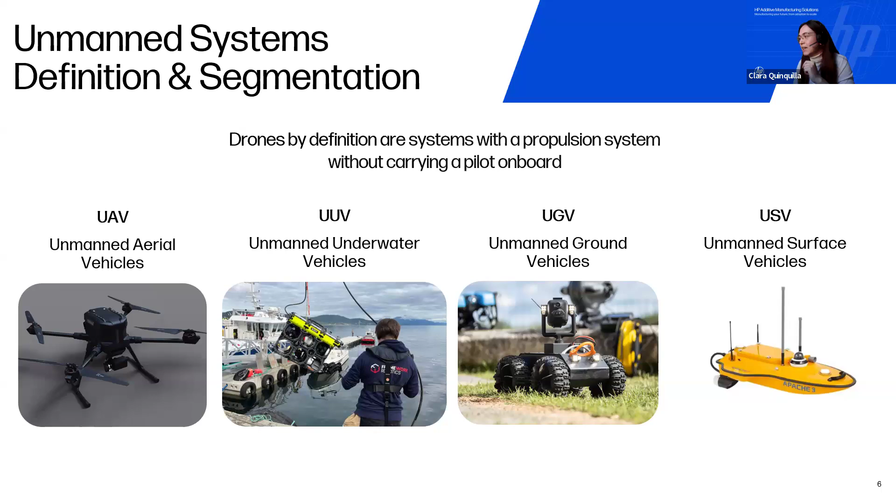You might be thinking that we all know aerial drones, but the reality is that there's a wider variety of drones. Our technology is being adopted in all four subsegments within the drones market, but due to the nature of our guest today, we're going to focus on aerial vehicles. The question we get the most is why our customers are using our technology. What are they printing?

The reality, in just a few words, is that they are using our technology to create highly complex UAV designs to achieve maximum performance. When we talk about performance in the drone space, we are talking about lightweighting parts that need to be aerodynamically optimized. So these parts are not just for rapid prototyping, but due to their isotropic strength, they are used as final parts.

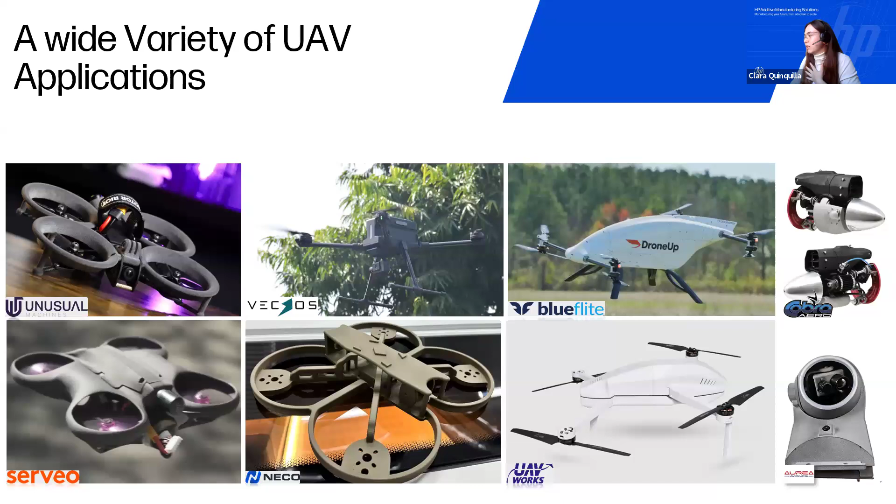Of course, there's the Hunter drone from UAV Works. I'm not going to be talking about this one because we have time later on. But yeah, I believe that this slide is useful for understanding the type of components and the usage that our technology has in this field. So I won't take so much time, but really briefly, the three main pillars of the value proposition that we have in this space. I've been talking about this for a while now.

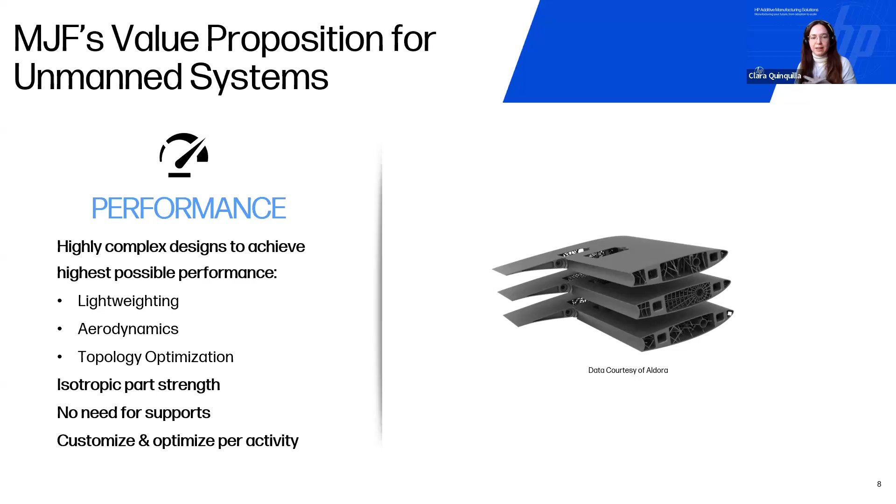The first one, and for me the most important, is performance, because again, here we are talking about components that are just not plug and play, but that need to be super lightweight, optimized in an aerodynamic way. So we are really good at printing parts that are really thin, but are also performing as they need to perform. So for those of you that might not be familiar with our technology, it's a powder bed fusion technology, which means that there's no need for support, which means that any kind of shape can be printed. So this is an example of the infill of a wing using different lattice patterns. Anything is possible with the technology. We just take off the powder inside the parts and we can print whatever shape. So the customization and the possibility to design anything is there.

Then the second one is time to market. We're going to be seeing the story from David, but in this space, it's really important to keep on iterating on the design, optimizing the parts, redesigning the parts. So it is important in this space, the ability to print and produce fast, to test, fail, repeat, and again. And the ability to do such a thing using the same material, but also the same manufacturing method is a positive thing. So this is something that we claim a lot.

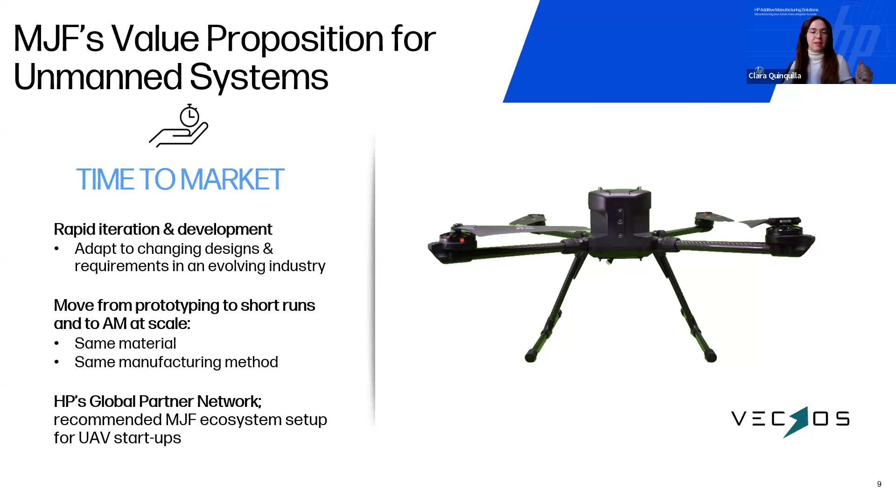And also just mentioning that many of our customers do not have the technology in-house and they don't need to. Just wanted to mention that there's the possibility to print the different parts through parts providers, which is something that I also like to mention, because there are a lot of companies populating this market. They need to grow. I mean, from the very beginning, it's possible that they don't have the need to have the machine in house. That's not a problem in this space.

And finally, the third column is about scalability. At the end, our technology is a technology that was born for scaling applications. So it doesn't matter how much you use the technology, you can take this technology to the limits. And also just wanted to mention as well that the vast majority of the components that our customers are producing fit in our build volume, which is important. But yeah, having said the basics on the technology, let's jump into the work that David has been developing from UAV Works.

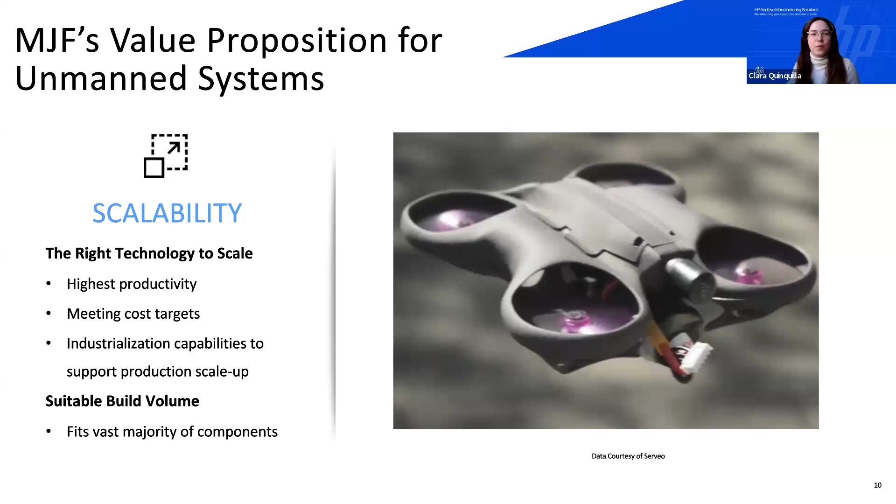So maybe you can let us know a little bit more about who you are, what do you do? Sure. Yeah, as Clara said, I'm technical director of UAV Works. We are a small company that mainly does consultancy in engineering, and we also develop our own drone. So I want to explain to you a little bit the projects we have done in the past and what we are doing right now.

And as you can see here, we have done all kinds of projects. We have done the paperwork to open a new airport, a 25-kilogram drone mimicking the sensors of a satellite, a robot for cleaning windmills, a robot that moves on a cable. It's a cable cam. Someone will know about this kind of robot, and I will show you the electronics box of this drone later, because we did all the boxing with multi-jet fusion.

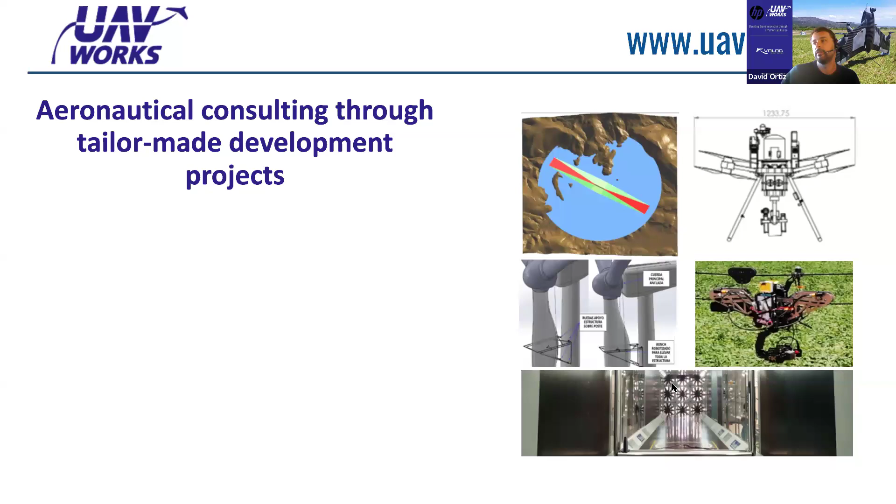And the last robot I wanted to show you is a robot that moves inside a wind tunnel to characterize all the fluid dynamics inside of it. And on the other hand, the things I showed you are the consultancy part, and this is our own designs, intended to be sold as a production product.

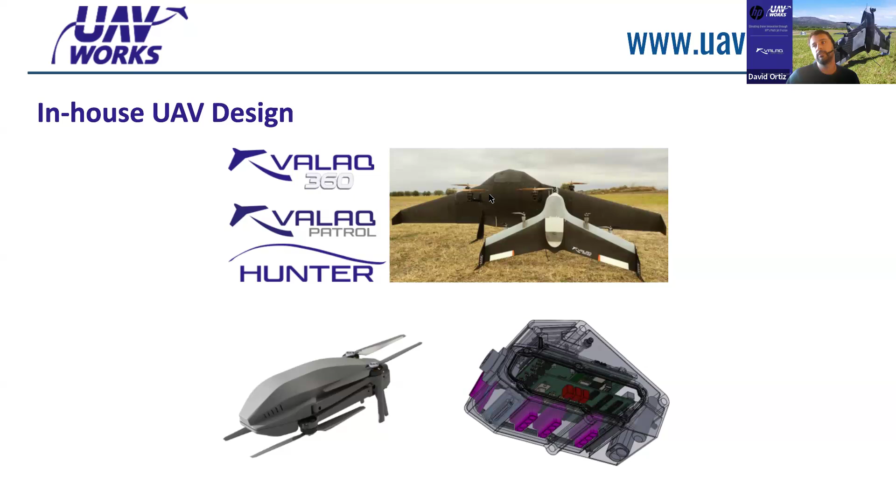Okay, so here we're going to talk about the Valaq 360 and the Valaq Patrol and the Hunter, that is the foldable multi-copter drone, and this is the electronic box of the cable cam. The Valaq Patrol is a surveillance drone that weighs 5 kilograms, and the Valaq 360 is a multi-role drone whose maximum takeoff weight is 25 kilograms.

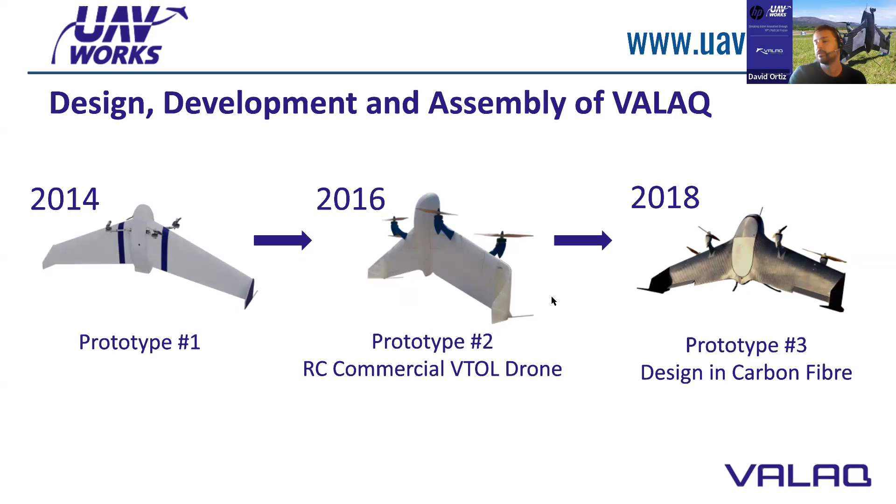In 2018, we switched to carbon fiber because you all know the benefits of carbon fiber, but there were still parts in FDM, but they weren't final parts because, as you already know, for the pylons of the motor mounts, they don't withstand heat very well, and the finish quality is not good. So we finally switched to multi-jet fusion, and as you can see, there are a lot of parts.

And in 2021, we had a final product that to this day is still evolving. We have some changes right now that are not in this picture, and the final product is a drone able to fly at 120 kilometers per hour, 110 minutes flight time, 5G, camera with auto tracking, well, a lot of things. You will see a video later.

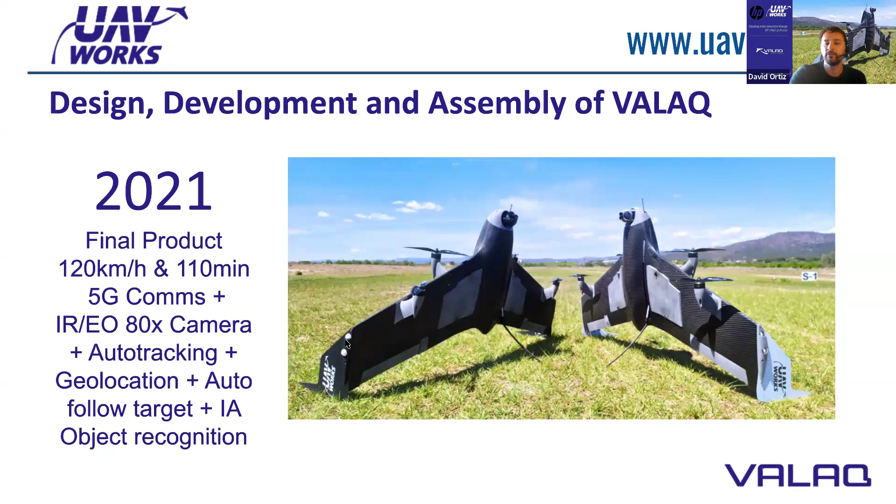Well, we adopted multi-jet fusion because it allowed us to customize every part, being able to modify everything if we need it. At the moment, we are modifying the batteries, so we need to modify this part of the outer shell of the battery. That will be super easy to do. We have no molds to modify, super fast and cheap. And also, by iterating all the designs, we can reduce the weight a lot, as we will see with the motor mount.

Okay, but first, I think I'm going to show you how this product flies and works. You are curious about that? So the flight of the drone is totally automatic. You only have to worry about the camera, and you select take off on the screen of the controller, and the drone will take off and circle around the takeoff point, at the radius you set and the altitude from terrain you select.

And once the drone is in the air, you only have to worry about the camera. So you select, now it is selecting the altitude, and with the second move, you are selecting the radius from the target or the takeoff point.

So you can see we developed a very useful tool for police or whatever authority needs that kind of stuff. Oh, so we ended with the video part, and now we are going to explain some of the parts of the drone.

Okay. This part here is the batteries. And as you can see, there's a battery that fits from the lower part of the wing. And there are 2 built-in screws that turn one turn. And you can fix the battery in the drone and remove it only using these 2 screws.

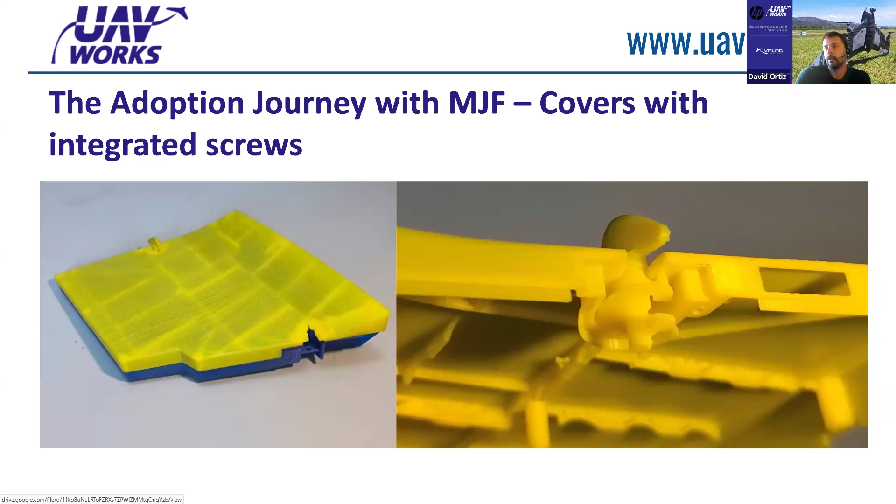At first, the drone was like this. The batteries were like a normal battery. You place it from the center bay of the drone, but you have to remove whatever you have here, and it was super unpractical. So we decided to move to this design. We at first designed all the parts and printed them FDM. The screws were popping mechanisms that you printed in another layer direction, and then pop it out, pop it in. We tried it and it works, and then we switched to the final part in multi-jet fusion.

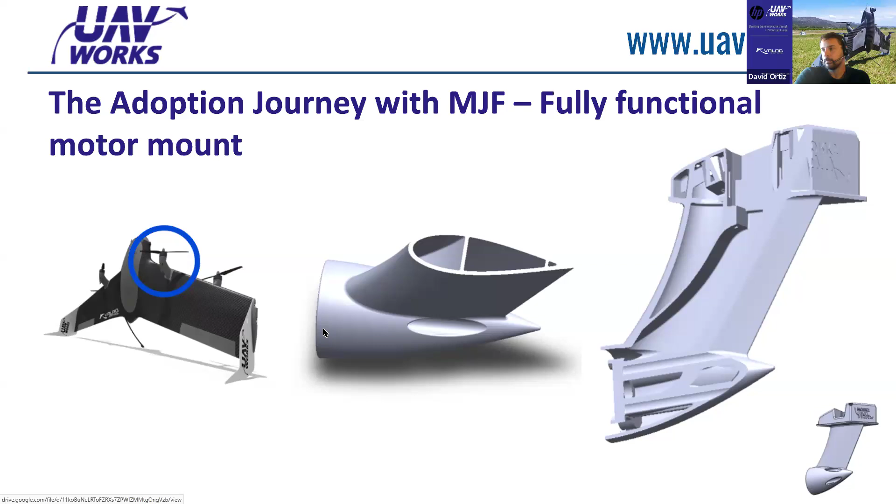And this other part is the motor mount. As you can see, it's a hollow structure able to withstand the temperatures of the motor, with holes in the back to allow the airflow of the motors, and it also has a nut soldered in the plastic, and there's a connector here to connect it to the drone.

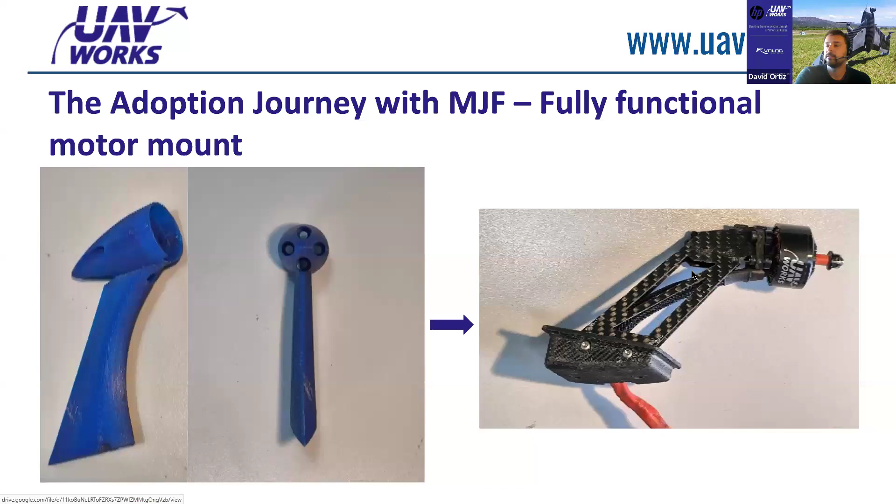And this evolution is more interesting because we did a lot of changes. At first, it was in FDM. We tried it; it worked more or less, but we had reliability issues because if you leave the drone in the sun, or you fly it a long time in hover and it overheats, the plastic will fail. So we switched to CNC machined carbon fiber sheet, and it was working properly, but it was awful in aerodynamics. So we had to put some fairings. So we ended with a super complicated part to build and super heavy.

This is wild, David. I mean, the fact that you can print it in just one component while also optimizing the airflow of the part, this is amazing. This is the right usage of additive in general. I really like this storyline. Yeah, for us it was also amazing. You can imagine needing to assemble all this and print a lot of parts, screws, a lot of things, or it's just one piece. Super easy to build, cheaper, everything lighter.

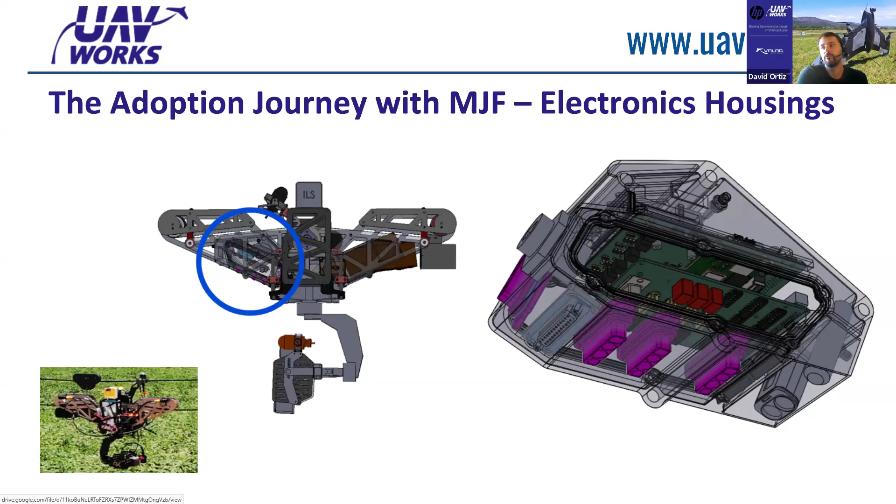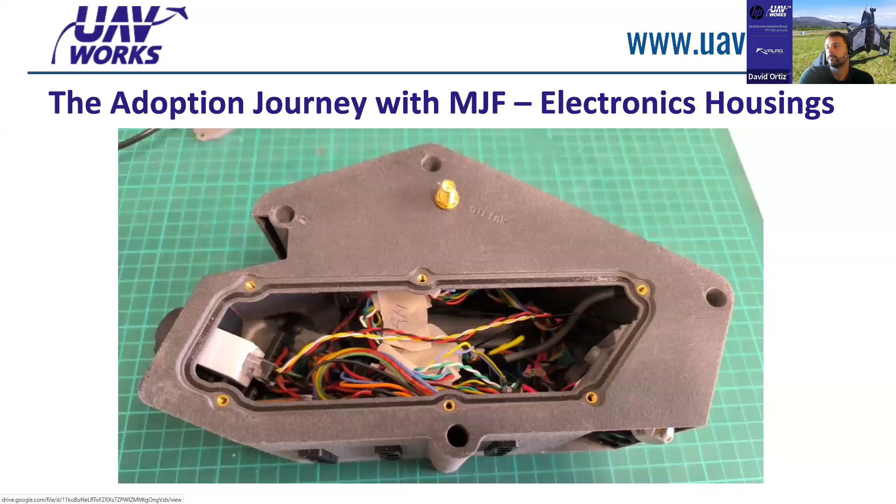A design that is impossible to do if you are not doing 3D printing, or it's super complicated to do it. So the box only has two accesses, left and right, and the doors are sealed. The actual part has a lot of sensors. There's a LiDAR, there's a humidity and temperature sensor, and a lot of antennas from data link, 5G.

So maybe one quick question regarding the previous case. Which IP was it? I think it's IP45, which means protection against solids greater than 1 millimeter, like dust, and water at low pressure from any direction. Okay.

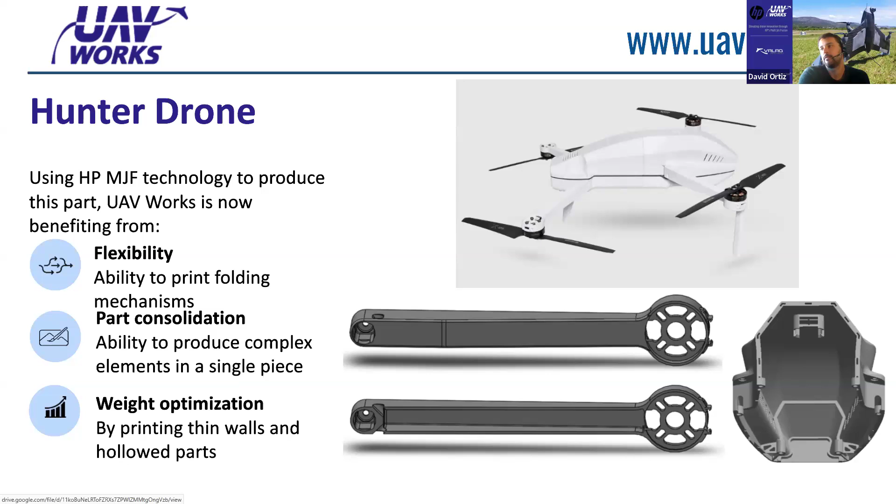And what's next? Next, we are going to try to switch the first drone I showed you, the Valaq, the VTOL aircraft, to 3D printed parts as much as we can, because if we can achieve a similar result to what carbon fiber does, it will make it super easy to build the drone. We are also working on the quality optimization for doing that, and we are trying to arrange a team to do this kind of new design. And as I already told you, this allows us to customize everything super easily if it's needed.